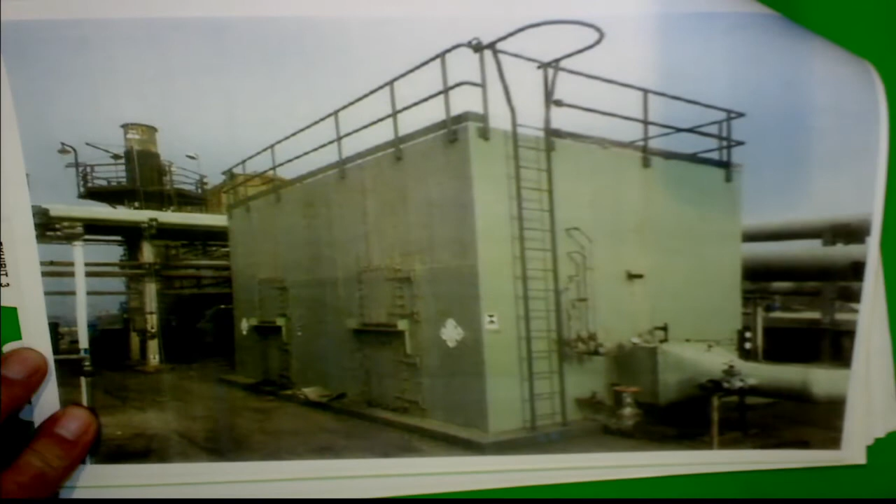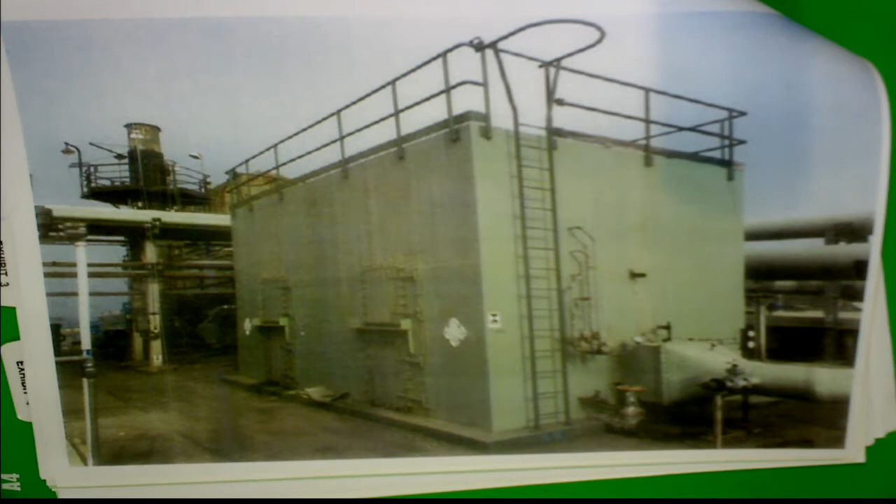Mr. Fawkes, I'd like you to flip to the photographs which are listed in Exhibit 3 to the petition. And I see you have that in the overhead. This is it. Mr. Fawkes, is this first photograph a true and accurate representation of the carbon units at the refinery? Yes, this is the existing V512A and V512B. Could you please provide the board with information on the photograph?

Sure. You see it as one large box, but it's actually split in half. One half is A, one half is B, and there's a diversion valve here that can route to one side or the other. You may notice in the background this stack, that's the stack of the RTO. The RTO is a large unit, isn't it? Yeah, we're going to get there in a minute. Anything more in this photograph? I don't believe so. Okay, let's move on.

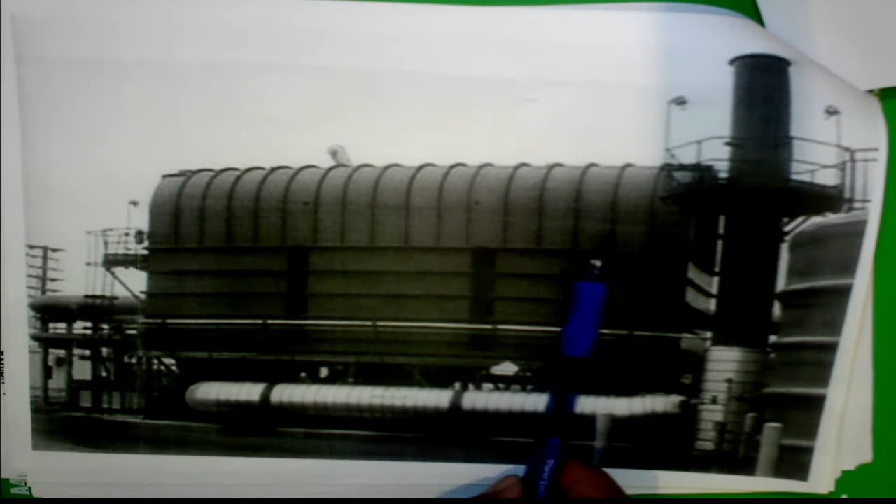Mr. Fawkes, is the second photograph in Exhibit 3 a true and accurate representation of the regenerative thermal oxidizer, or RTO, at the effluent treatment plant? Yes, it is. This photograph was taken when it was first built, so that's when it was brand new. It looks huge. Rather huge, yeah. There's 3 active beds that the regeneration takes place, and then here's the stack of the RTO. And this is the primary air pollution control device for the ETP? For T500 and T719, yes. Okay. Anything more to add on this photograph, Mr. Fawkes? I don't believe so. Okay, let's move on to the third photograph.

Mr. Fawkes, is this third photograph in Exhibit 3 a true and accurate representation of the effluent treatment plant at the refinery? Yes, it is. As you can see, it's taken from Google Earth, but as I know, it's the ETP, the correct image. Could you take a couple of minutes and walk us through this exhibit? Yes. Tank T500, you see it has a concrete lid. So you're on the far right side of the exhibit? Right side, outlining it there. The tank T719, which is the spent caustic tank, is this small tank here. The existing carbon adsorber units, V512A and B, are this rectangle right there at the tip of the pen. And then down below that is the RTO.

I may say that the rental carbon units that are coming in will be placed on the east side of tank T500, right along here. That's close in proximity to where the carbon units are located then. Correct, yeah. And then this open space will be taken up with the PAC unit that we'll talk about later. The powdered activated carbon unit? That's correct. And Mr. Fawkes, where the carbon units are presently located, that looks like a fairly tight space. Is that correct? Yes, it is, and that's exactly where we want the new ones to be. So we're going to put the carbon units in the same locations as the existing ones. You can't build them off to the side and route it over, given this plot. That's correct. Okay. This is one of the reasons why we're asking for a lengthy variance period.

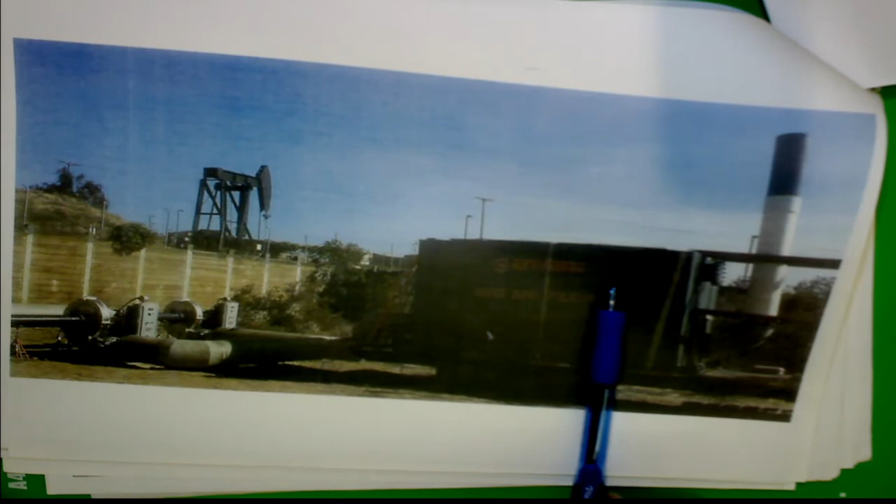Is this fourth and final photograph a true and accurate representation of one of the portable carbon adsorption units being rented from Envent? Yes, it is, and obviously this is from another location, not brought in yet, but it's identical to what will be brought in. So this portion will have 20,000 pounds of carbon, which we'll show later, and then 2 blower fans for each unit, and this piping here will be connected to T500 and T719. I believe later we have another exhibit that'll show how that'll be done. There's actually 2 of these units that'll be set up. We do have a black and white schematic showing how this unit would be set up at the ETP. Correct. Anything more to add, Mr. Fawkes? No. Come on back. Thank you.

Good job. Mr. Fawkes, is the subject equipment essential to refinery operations? Yes, continuous operation of the ETP is crucial to refinery operations. Without the ETP, the refinery cannot operate as designed. Operation of the ETP is required to process wastewater from the refinery.

The ETP is the final step of the process water before the wastewater is discharged into Santa Monica Bay. Mr. Fowles, does Chevron hold a National Pollutant Discharge Elimination System, or NPDES, permit for this equipment? Yes, the separator is subject to an NPDES permit, which allows for discharge of the wastewater following treatment directly to Santa Monica Bay. We are responsible for maintaining compliance with those effluent limits in the NPDES permit.

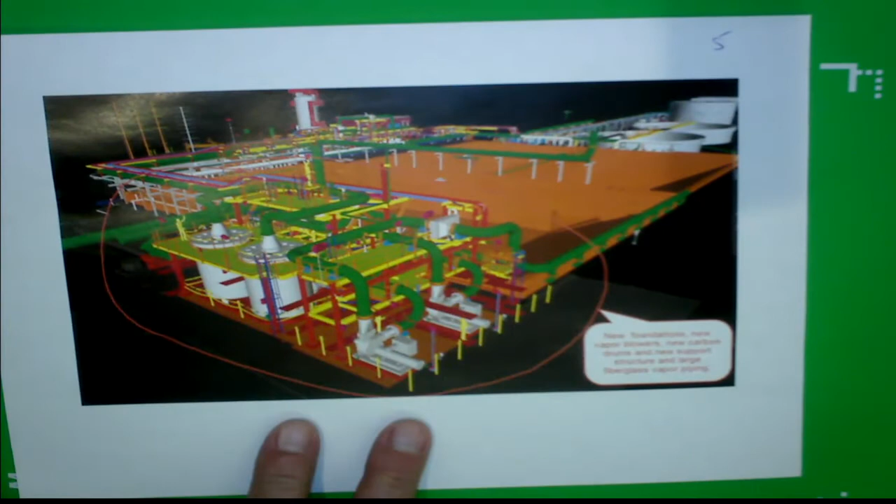At this time, Mr. Fowles, I'd like to draw your attention to the exhibit that's been marked exhibit number 5. Could you please approach the overhead? Mr. Fowles, is this diagram a true and accurate representation of the new carbon units that are going to be constructed at the ETP? Yes, that's what I understand. And is this in the same location as the existing carbon units? That's correct. And could you please highlight for members of the board information in this color diagram?

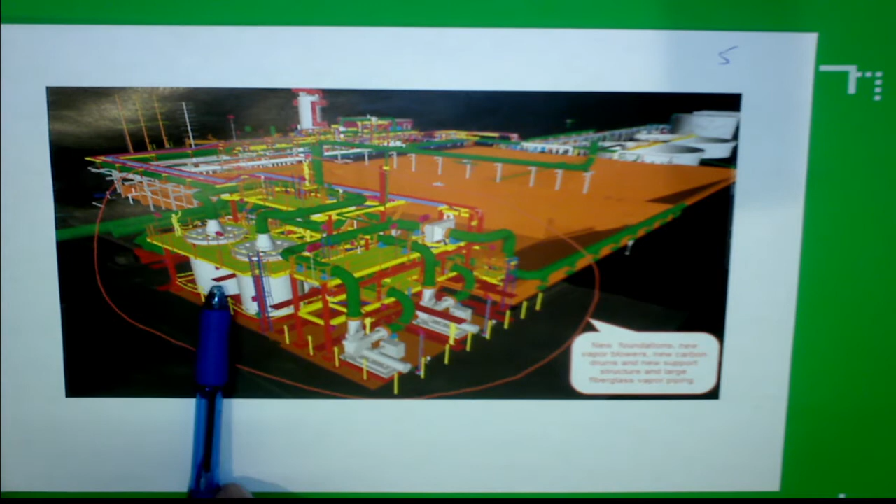Mostly what I want you to realize is this is a more complex system than the existing one. The V512A and B are now separated in separate vessels. They'll have blowers to bring the vapors to them. There's quite a bit of piping. I won't try to chase it for you, but now we'll be able to run these carbon adsorbers in series rather than in parallel as the existing ones, and they'll give better flexibility in operation and reliability.

Mr. Fowles, could you please describe parallel versus series? I believe I can. In parallel operation, we have the two beds next to each other, and it's either one bed or the other, 20,000 pounds. In series, we'll run through 10,000 pounds in one vessel and then be routed to 10,000 pounds of the second vessel. What that allows us to do is monitor the VOC breakthrough in between vessels. So you'll never have a breakthrough. You'll see it in the first vessel, and then you'll be able to swap them and regenerate or replace the carbon in the one vessel that went over.

So arguably, the new carbon units would be more efficient and operate a little bit better than the existing carbon units. That's correct. Also, the switchover from RTO to carbon units will now be automatic instead of operator controlled. It'll have an MOV, I believe, or be air operated. Well, it certainly looks more complicated than the box structure that we saw in the photograph.

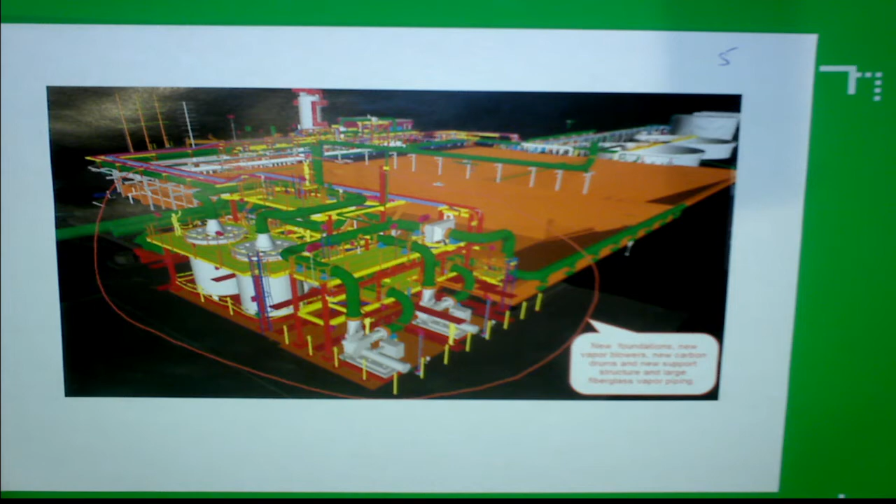Go ahead, Senator. Because this new carbon unit differs from the old one. This one has a vapor blower, new carbon drum, and fiberglass vapor piping. That's different from the existing one, is that correct? No, the existing is fiberglass FRP as well, yes. Okay, that was my question. Thank you. You can continue.

Thank you so much. Mr. Fowles, do you have any more information to provide? Not on this. Later? I'd say save that for later, yes.

Mr. Fox, I referred to this in my opening, but can the refinery stay in operation without the ETP in service? I'm sorry, Mr. Norton, one moment. Senator? Then what is the difference, the significant difference, between this system and the carbon system and the other one?

The operability. The existing one has two halves of 20,000 pounds of carbon, and we'd use one half at a time. To know when to replace that carbon is when you get breakthrough at the end of that carbon, and then we'd switch over to the other one. The new one will have two vessels of 10,000, so we still have 20,000 of carbon in operation, but we'll have the ability to sample the vapors in between the two. And once the first vessel has breakthrough, we can swap them, so you'll never have breakthrough to the atmosphere.

In addition, there are some automated valves so that when the RTO goes down, we'll be able to go to carbon much quicker than currently. Thank you. Sure. Thank you. Mr. Norton, you may continue. Thank you. And Mr. Fawkes, can the refinery stay in operation without the ETP in service?

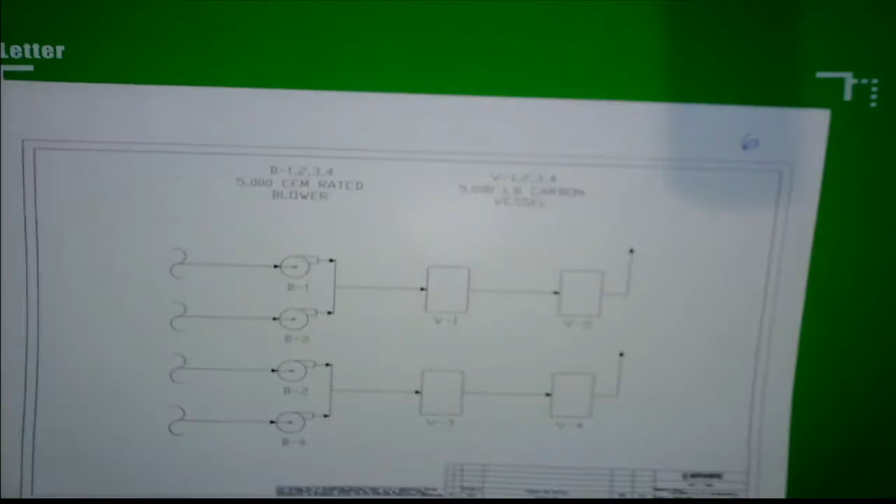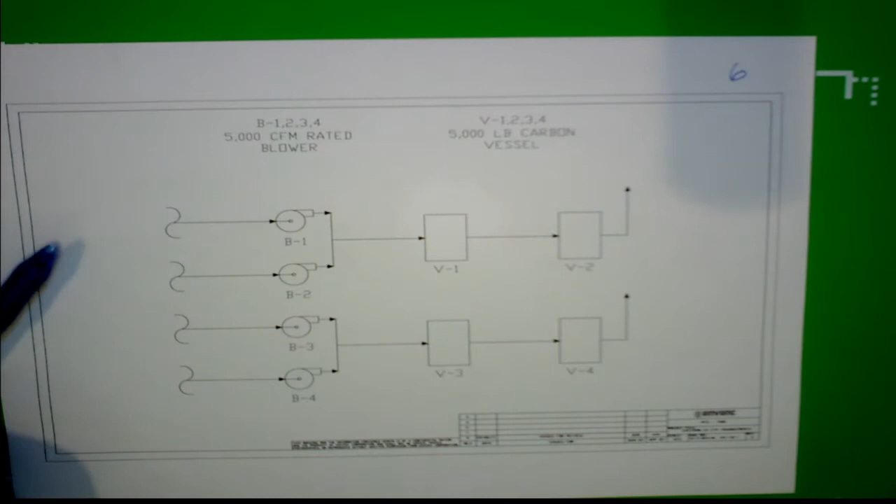Mr. Fowles, is this a simple diagram of the temporary carbon adsorbers to be installed at the refinery during the variance period? Yes, it is. And could you please highlight for the members of the board information in the diagram? Yes. These 4 lines on the left will be connected to T500, T719. And those vapors will be brought through these blowers marked B1 through B4.

You notice there's 2 halves to it. Blowers B1 and B2 will go through vessels V1 and V2. Each of those 4 vessels has 5,000 pounds of carbon. And the photo we showed you in previous testimony was just showing basically 1/2 of this schematic. It showed 2 blowers and the 1 box that has the V1 and V2. So there'll be 2 units like that shown in the photograph connected. Total will have 20,000 pounds of carbon that'll be treated just like the existing V512A, V512B.

And the photograph you're referring to is the second photograph in Exhibit 2, correct? Excuse me, no, not the second photo, the fourth photograph. I apologize, it's the fourth photograph in Exhibit 2. I should have each one of these labeled separately, apologize.

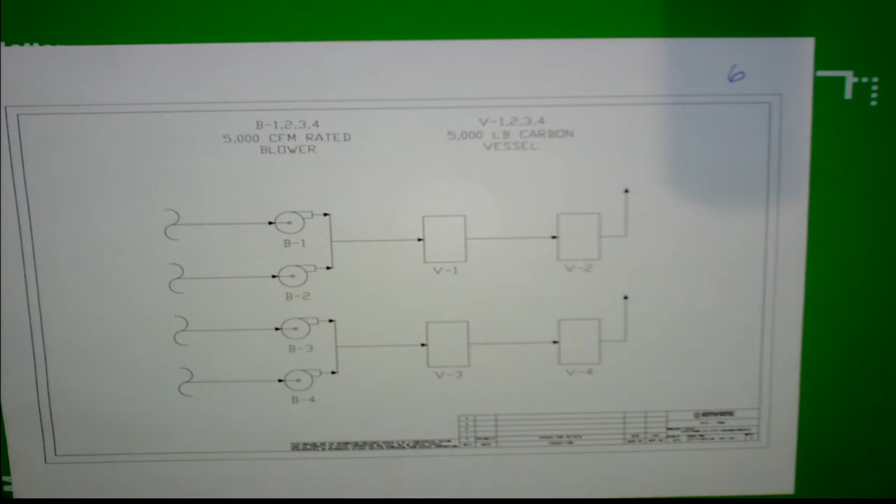And so I'm flipping to the fourth photograph in Exhibit 2, and I can see the vent unit, and I can see the blower motors. Right. And that's similar to what we'd see installed at the ETP? Yes. Just twice, right. Yeah. Got it. Okay. Anything more to offer here? No, there isn't. Thank you.

Senator has a clarification question. Clarification. This diagram represent the blowers for one vessel or for two? These will be the replacement carbon units. And like the photograph showed two blowers and one large box. Right. That's one half of what will be brought in. Two of those units will be brought in. So this diagram, B1, B2, V1, V2, is a schematic of what that photograph was. And there'll be a second identical unit like that with blowers B3, B4, and vessels V3, V4. Okay, thank you.

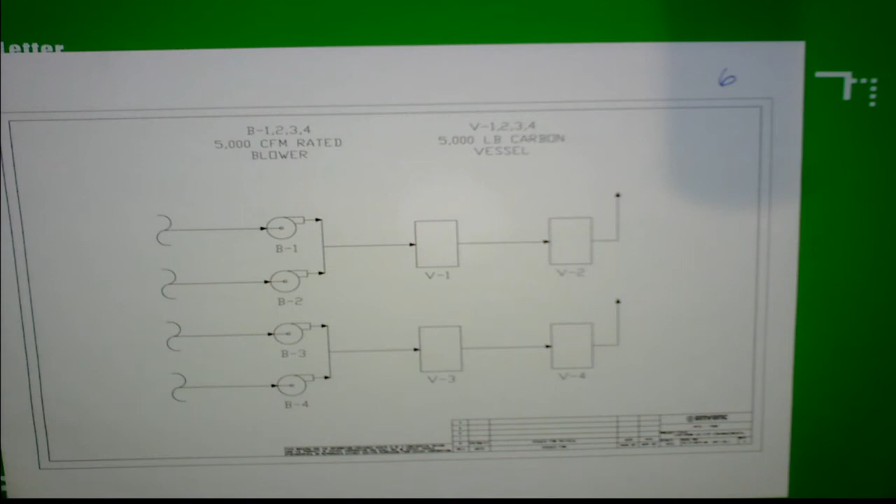Thank you. Mr. Norton, you may continue. Thank you. Good job.

Mr. Fowkes, do the portable carbon adsorption units work as well or better than the existing carbon units? Yes, if the portable carbon adsorbers are placed in service because the RTO is down, then the emissions should be lower than normal during normal operations with the carbon units. With the use of these portable carbon adsorbers, there should be no excess emissions.

Will Chevron continue to monitor for emissions during the variance period? Yes, Chevron will monitor for VOC emissions during the variance period. Monitoring will be performed on the portable carbon adsorbers when the RTO is down. The district permit for operation of the portable carbon adsorbers also contains monitoring conditions applicable during the variance period. Will Chevron make this data available to the district? Yes, we will. We can make the monitoring data available.

At this time, I'd like to introduce the revised proposed regular variance conditions. Those have been marked as Exhibit number 7. And just note that the parties have worked together on the proposed regular variance conditions.

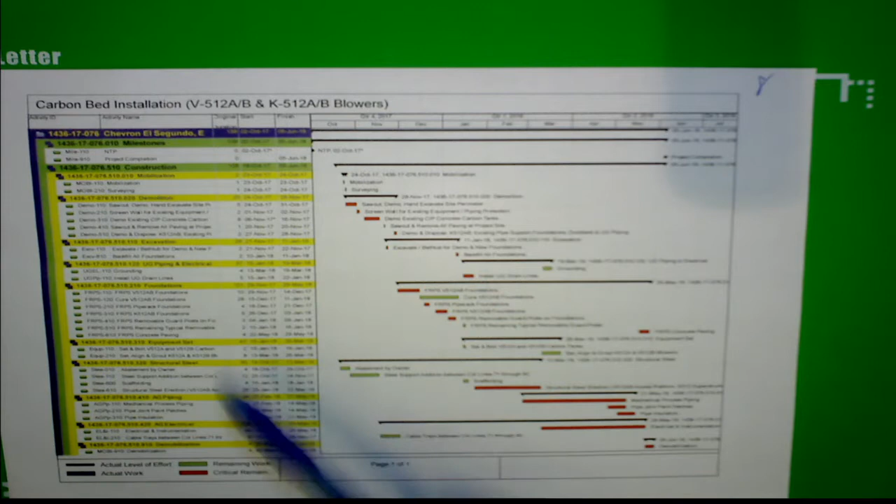They need to disconnect and demolish the existing V512s. There's a lot of surface preparation that needs to be made, electrical connections, electrical piping and stuff. At the bottom, you'll see that they expect the work to complete by June 5th, and this is after the new V512s are installed, and you saw that schematic earlier that it is quite more involved than the existing 512s. Yeah, that makes sense, given the color diagram that you showed before.

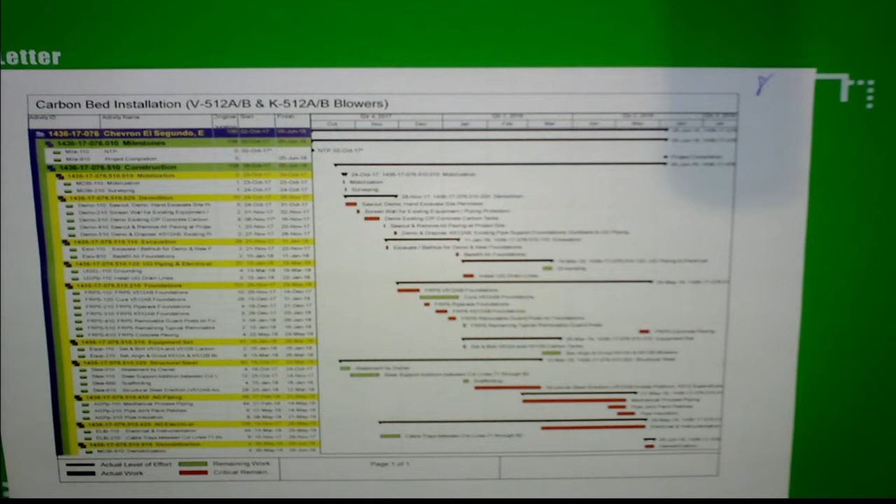Correct. Anything more to add, Mr. Fawkes? I don't think so. Could you come on back? Yes. Thank you. And I won't send you up there again, I promise. I take it back. Would you? Senator had a clarifying question.

Somewhere in your report, there's some statements or testimony regarding a 6 month time frame for completing the project. And thank you very much for asking that question. It leads up to our next question for the witness, which is on the time frame. Because the petition was prepared and filed for notice requirements quite some time ago. August 3rd is when this was actually filed, and we know more now. But you still had a timeline of 6 months at that time, right?

We're going to ask for a little bit more time. It appears that you are. Yes, we're going to do that. That's why I raised the question based on your timeline. If we might, Mr. Fawkes, what is the time frame for achieving compliance in this matter? We plan to start the work as soon as possible and be completed by June 5th. However, the date for completing the work is unknown. We could experience delays. We asked for 60 days following the projected completion date for the variance period.

As such, Chevron requests that the regular variance period in this matter begin today and continue through August 4th, 2018. If we complete the work sooner, we will notify the clerk and the district that final compliance has been achieved. Is there any reason you believe?